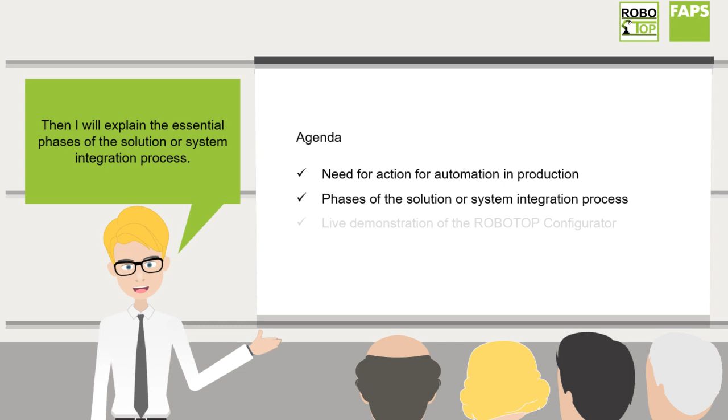I would like to show you a way how you can lead your company into a digital automated future. The presentation is divided into 3 parts. First, the need for action towards automated production. Then I will explain the essential phases of the solution or system integration process. This will help you better understand why the help of a system integrator or the ROBOTOP platform is useful for a company inexperienced in robotics. Finally, the ROBOTOP configurator can be seen live in action.

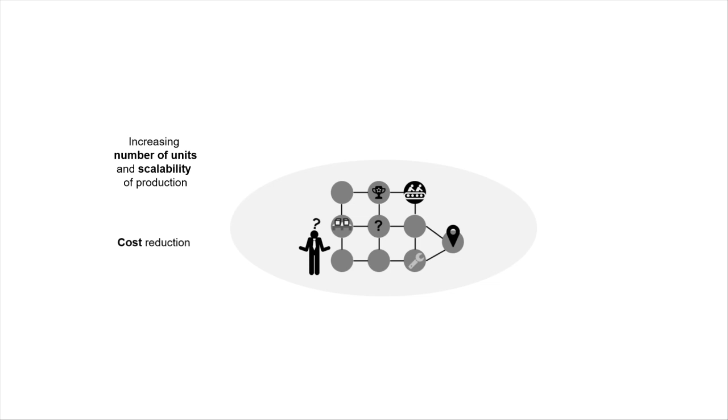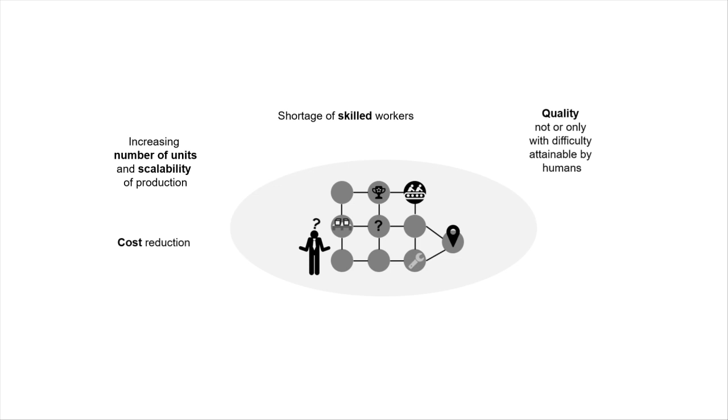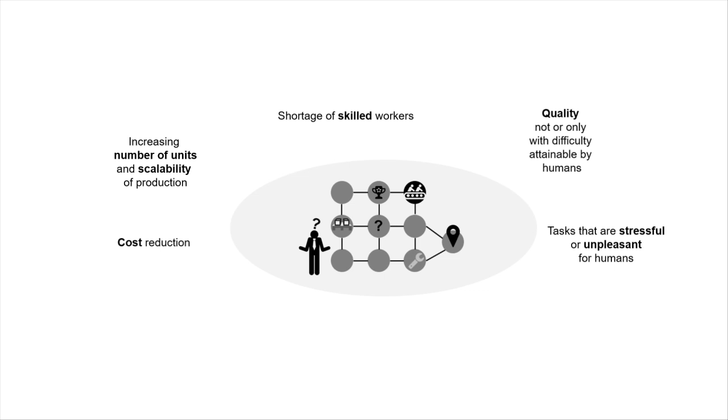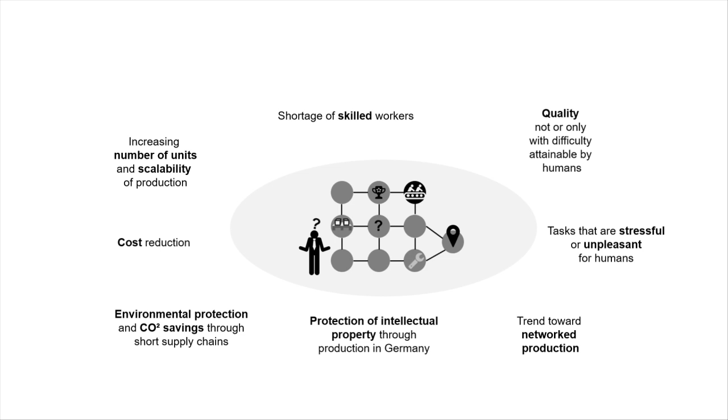Why should you automate and for what reason is there a current need for action? Due to increasing competition, it is becoming increasingly important to make production more flexible and dynamically scalable at low cost. At the same time, the competition for the few available skilled workers on the labor market is increasing. In addition, the desired quality along manual processes cannot be achieved by employees, or only with difficulty. Also, many manual activities are stressful or unpleasant for people, so an automation solution increases employee satisfaction. Last but not least, due to increasing globalization, the topics of networked production, protection of intellectual property, and environmental protection through shorter supply chains are moving further into focus. These are favored by automated production on site.

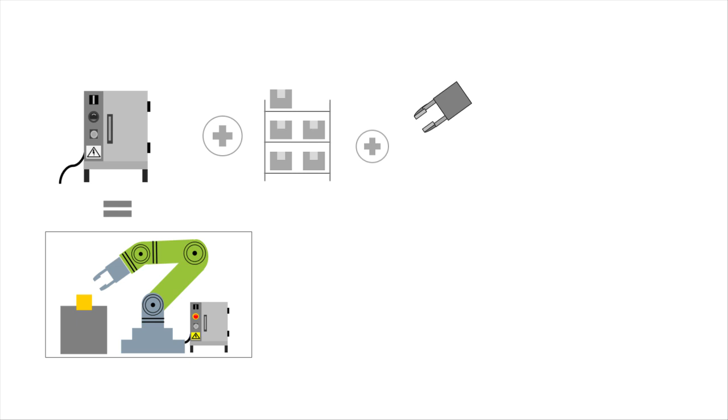But how do you and your company come to an automation solution? You are a small or medium-sized manufacturing company, in short SME, and expert for your product and its manufacturing process, but not for automation solutions. Should your employees configure a robot-based automation solution themselves? And of which components does a complete automation solution consist? To arrive at a turnkey solution, you do not usually buy individual components directly from component suppliers such as grippers, robots, sensors, etc., but instead commission a system integrator.

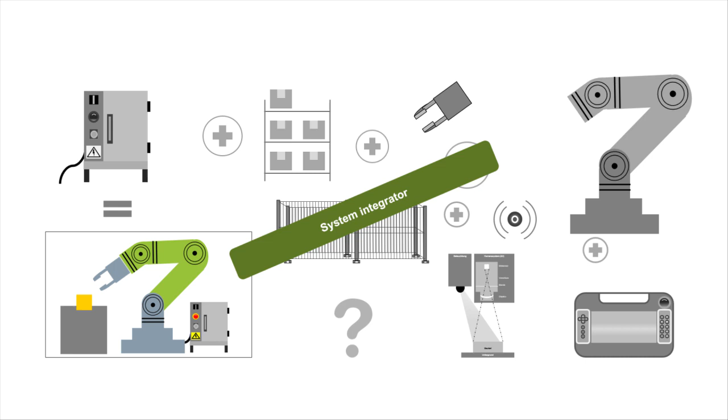Now I would like to explain the main steps of the typical system integration process. Usually, manual production is the starting point for automation. Along the assessment, the current processes are analyzed and evaluated with regard to their maturity and their economic automation potential. Especially for small and medium-sized companies, so-called incremental automation is used. For the most economical or most important subtask, a specification sheet is then created that reflects the requirements from the perspective of the client. Based on this, the system integrator develops a system specification. This documents the possible technical and economic assurances from the perspective of the system integrator as a contractual framework.

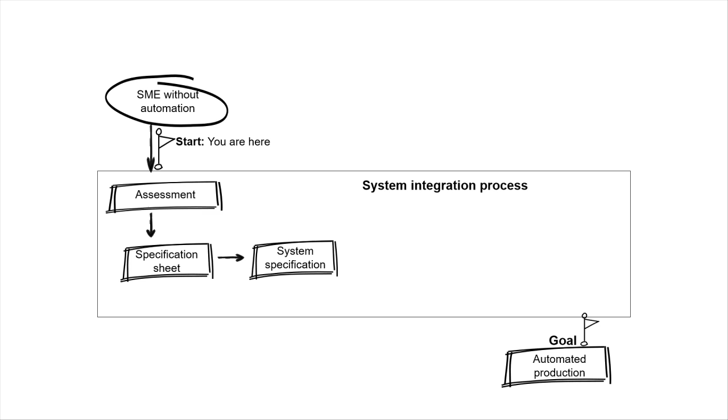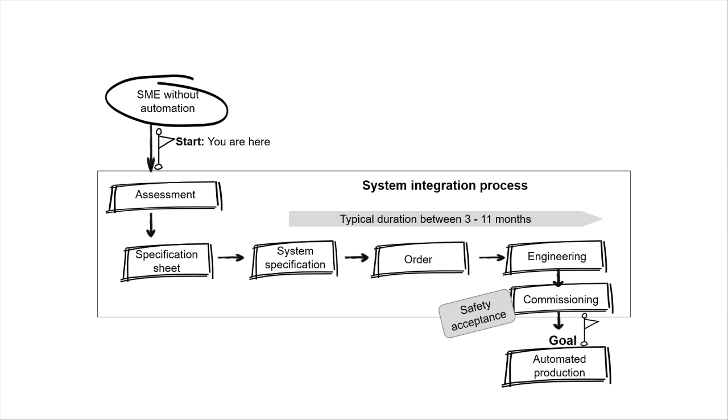Since these are investment assets, the robot-based automation solution is ordered only after a detailed consideration. After a project duration of typically 3 to 11 months, commissioning is carried out by the system integrator. Frequently, the topic of safety during commissioning is strongly underestimated, but only afterwards the process is completed and production can start. ROBOTOP supports you in the generation of a first basic concept and thereby reduces the required time and costs.

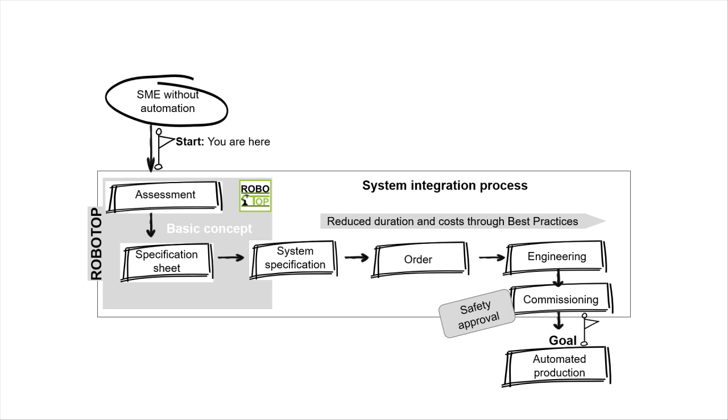Now you can see a sample taken from the ROBOTOP configurator. Step 1: So-called best practices, i.e. successfully implemented automation solutions, are available as examples. These are filtered based on your selection criteria such as type of process, quantity, cycle time and costs. The selected best practice serves as a starting solution for the further process.

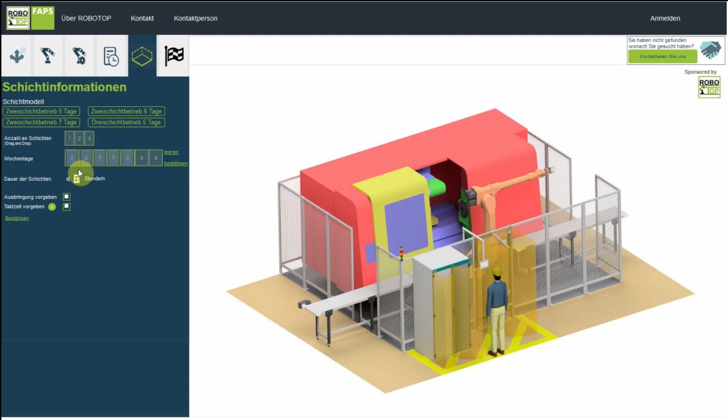Step 2: Customization configuration and customization of best practices for your use case. The process parameters, such as delivery condition and cycle time, are individualized. Subsequently, additional requirements are included, such as space restrictions, desired autonomy time, protection class and data connection. The required cycle times can be calculated by entering the shift information of the previous manual production, from which the economic potential of the automation solution can then be identified.

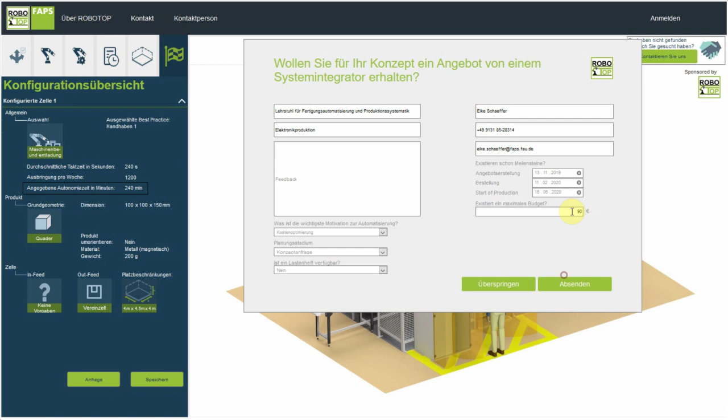For a better overview, the main results of the configuration are summarized very briefly. On request, your configuration, contact details and other requirements will be forwarded to a specialized system integrator who will support you in the further process.